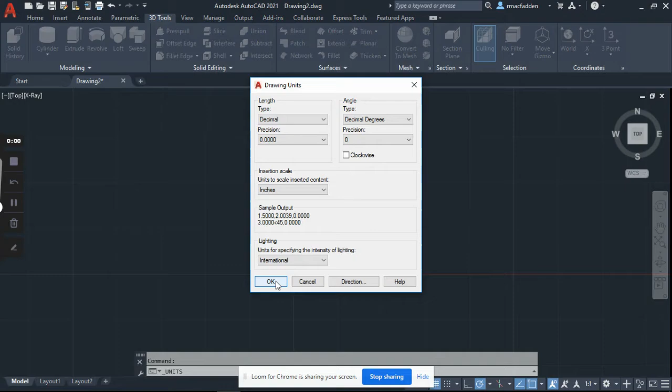Next, go to the toolboard. I have 3D tools open, but if you don't, go to Show Tabs and select 3D tools so you can view the toolbar I'm using. Once that's done, we'll start with our first shape.

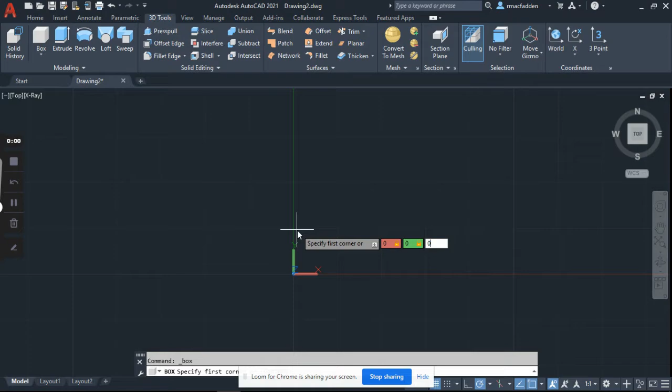We start with a box at coordinate point 0, comma 0, comma 0 - the X, Y, and Z coordinates for the start of our box. Once I hit enter, the second corner is 2 in the X, comma 1 in the Y, comma 0.125, which is the decimal equivalent of 1/8 of an inch. Once that's selected, I hit enter.

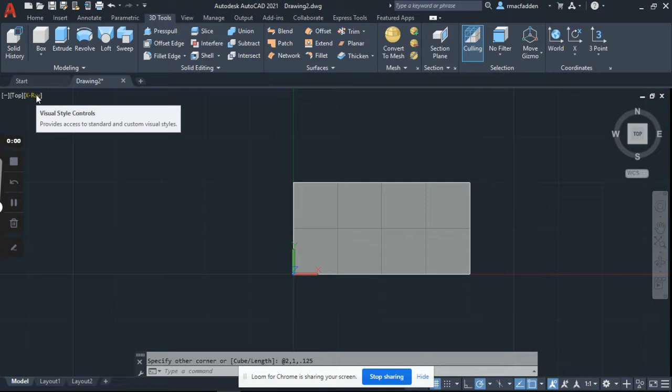If your object looks different, this is shaded gray. In the top left of my screen, I have X-ray selected. You'll be set to 2D wireframe when you first open the program, but I suggest working in X-ray as it makes things easier to see.

When I go to the view cube in the top right and select one corner, it takes us to 3D view, so you can see the object and the lines selected. In 2D wireframe it would still be there, but it wouldn't show that there's an object, just the lines. Alternatively, we could use realistic, which is solid, and we don't see the lines until highlighted.

My personal favorite is X-ray, so we'll move on to the second step: a second box. We're going to offset this one with coordinates 0.125 for X, comma 0.125 for Y, and set the height to 0.0625, which is 1/16 of an inch. Once those three coordinates are set, I hit enter, and it shows the box.

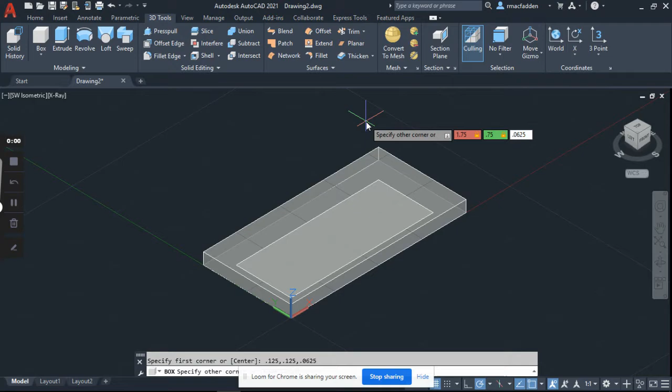We want a nice 1/8 inch border around the whole piece, so our secondary coordinates are 1.75 - a 1/4 inch less than our original - comma 0.75, a 1/4 inch less on the Y value, and 0.0625 of an inch, or 1/16 inch tall. Once we have those three coordinates, we hit enter again, and now we have a box within a box.

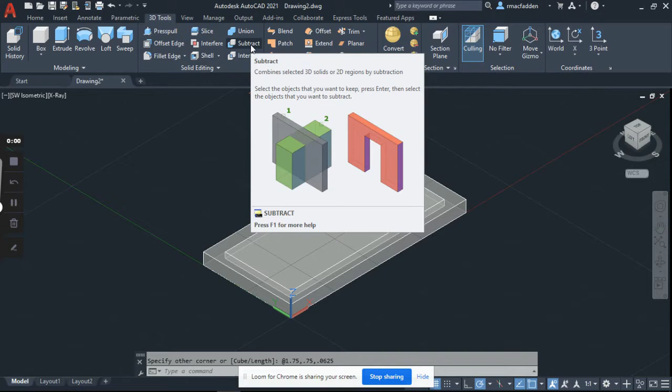We're going to make our first shape here using the subtract command. AutoCAD lets us hover over to see what we're expecting to do. We're subtracting our second shape from the first: first select the object you want to keep, press enter, then select the object you want to subtract. The object we want to keep is our main rectangle, the first one. Select enter, then make a new selection - making sure we only select the inner rectangle - and press enter again. Now you can see we have a recessed area.

For the next step, we're going to go back to our top view and hit the Home tab. On the Home toolbar, we have our text option.

So we're going to select single line text. We are going to start it somewhere off to the right, and we are going to make it a height of 0.375 or 3/8 of an inch. Depending on the size of your name, you may need to make this smaller, or you may be able to make it larger. My name is quite short. It's just Ryan, so 0.375 is going to fill my space nicely.

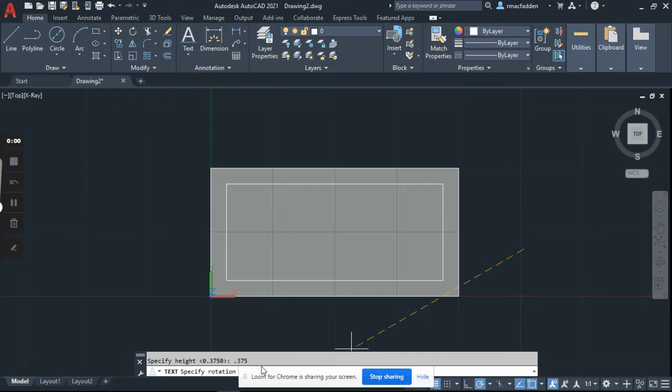Once I have the height, I select enter, and then it's going to, on the bottom, tell us to specify the rotation. We want to make that 0 degrees, polar or flat in line. Enter again, and it's going to give us our cursor or type prompt. So from here, I'm just going to put the caps lock on and do my name in all capital letters.

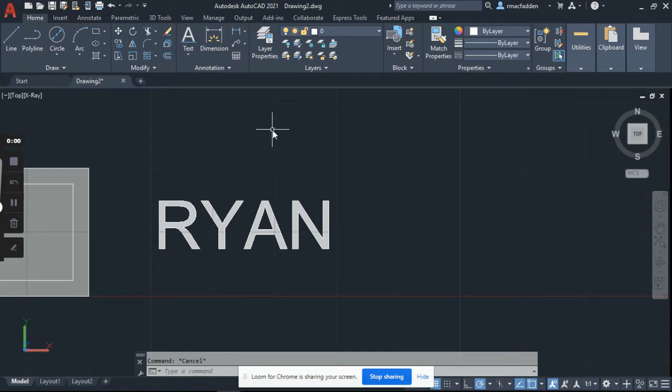I then click off the screen, and it's going to give me the opportunity to do more text if I so choose. I don't want to, so I'm going to hit the escape key a couple of times to get out of it. Now we can't manipulate this text as is, so what you need to do next is on our keyboard, type T, X, T, and we get this TXTEXP. Okay, so this is text explode.

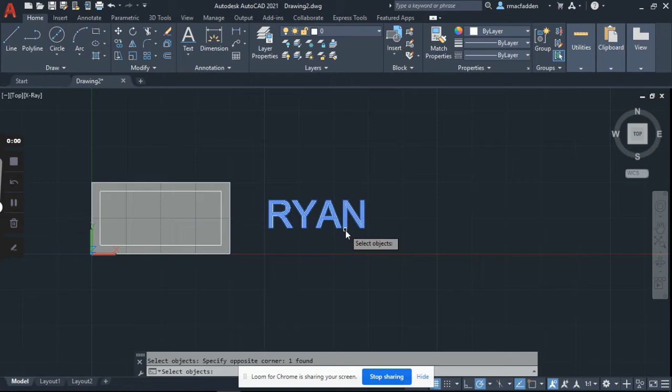By clicking anywhere to the right hand side and dragging left, we're able to select everything in that box. Alternatively, if we go to the right, only whole items within that box will be selected. So we're going to select all of our lettering and hit enter. It's going to work its magic, and now we have an exploded version of our text.

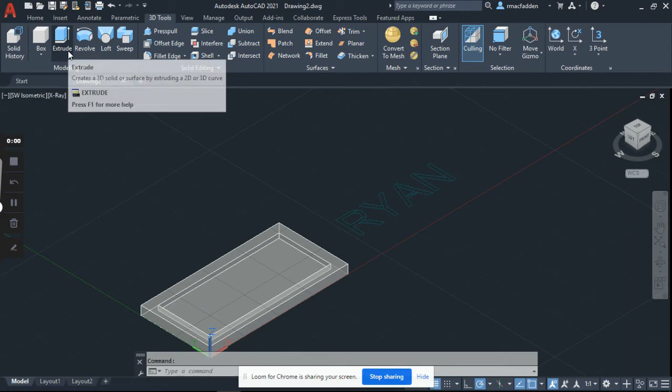The next thing we need to do, I'm going to go back into a 3D view on my view cube. We're going to make this embossed text within our key tag here. So I'm going to go back to my 3D Tools tab, and I'm going to use the extrude command. Again, the easiest way to select this is to click and drag over. Now all of the individual lines are selected.

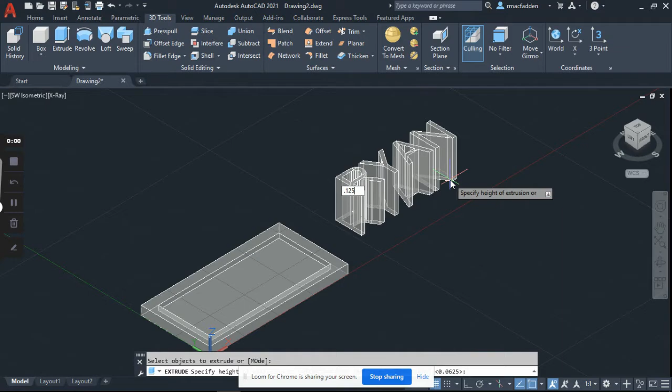I'm going to hit enter, and you can see I could snap to, but I'm going to use a measurement system to make sure that it all comes out the right size. So again, 0.125 or an eighth of an inch is all we're going to emboss it, and we're ready to move it on to the rest of our project.

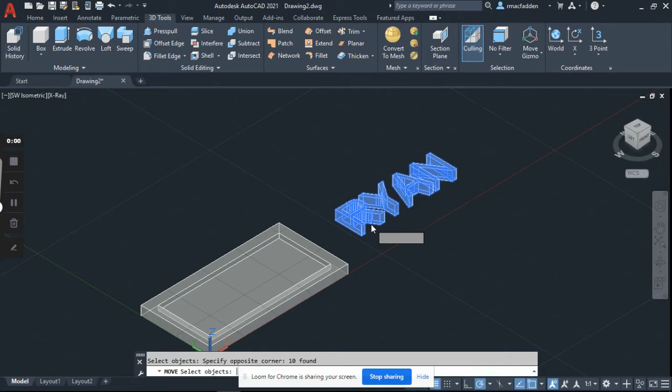Now I'm going to use the keyboard shortcut for move. By just typing the letter M, I get move as the first on my list. I'm going to select that, select all, double check, make sure that I have selected everything I want to. Again, the enter key moves me to the next phase of the command. I'm going to grab this by the lower corner indicated by this endpoint green indicator.

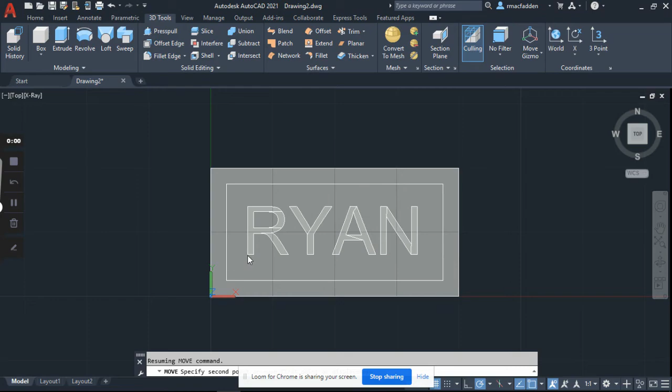Select there, and I'm going to go back into my top view so that I can appropriately center this onto my key tag. I'm going to leave it just slightly towards the top because of how the next part is going to go, which is going to be a hole for our keychain to actually loop through.

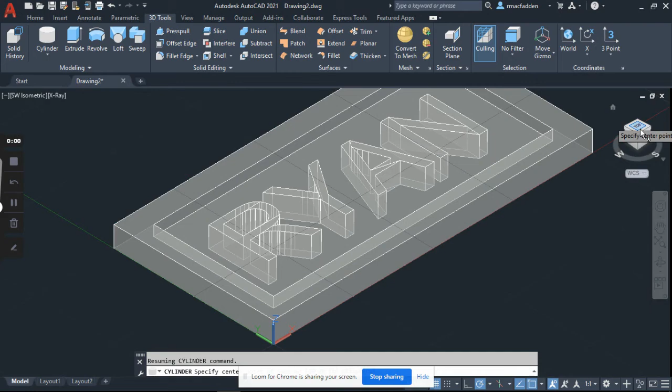With the hole, I'm going to go to my shapes in the top left, and I'm going to choose a cylinder. In my 3D view, I should be able to just grab an extension line. I'm actually going to go to this view so I can carry it straight. You know what? I'm going to go top view just to throw you guys all off. And I'm going to come straight down to about this corner. Roughly approximated is fine. And I'm going to make this diameter.

Let me move my little screen share Loom thing out of here.

A diameter on the bottom toolbar here of 0.25 of an inch. So 1/4 of an inch diameter all the way across. If you end up with a radius of 0.25, you're going to end up with a very large hole. So my 0.25 is going to look just like so, and I still have one more step in my cylinder.

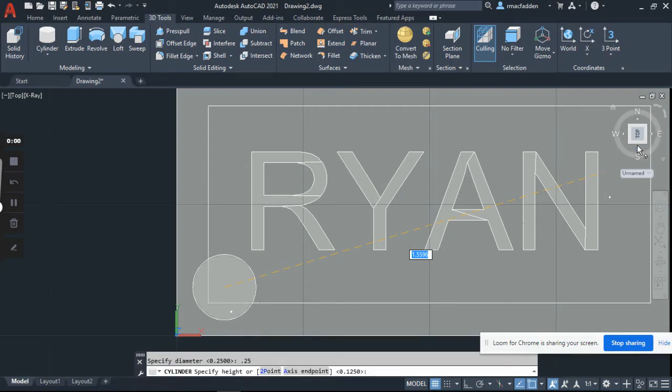I can't see it in this 2D view, but if I go here, I want to just pull it down. Anywhere down below is fine because we're going to go back to our subtract command, and we are going to select our main body, enter, subtract this cylinder, and voila, we have a hole.

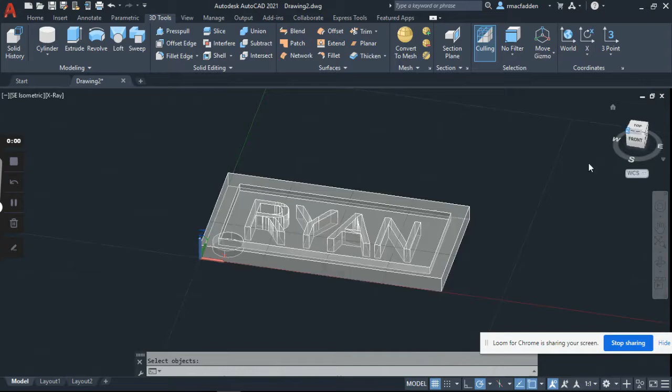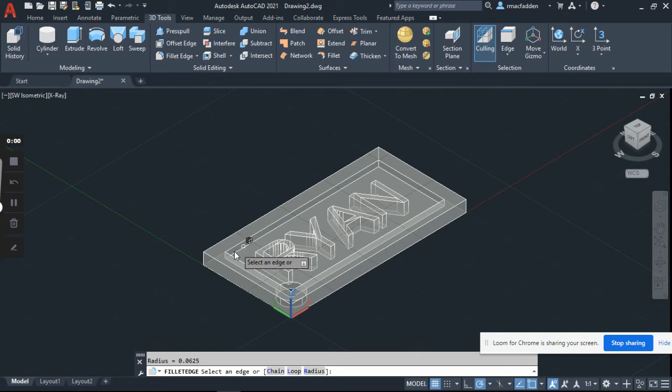So coming back to our main view here, we can have a look at our finished product. If you're happy with the square corners, that's fine. But I'm going to add some radiuses to the different corners, or fillets, to make things just look a little bit better. So I have this fillet edge command on my 3D tools. I'm going to select that, select fillet, and on all these outside corners, I'm going to select them.

So it's a little difficult to see because of our axes. And I may need to switch my view so that I can get to the last one over here. Once I've selected all of the outside corners, I'm going to select radius in my bottom toolbar, and I'm going to make that radius 0.25 of an inch. So a little bit bigger than what we see here.

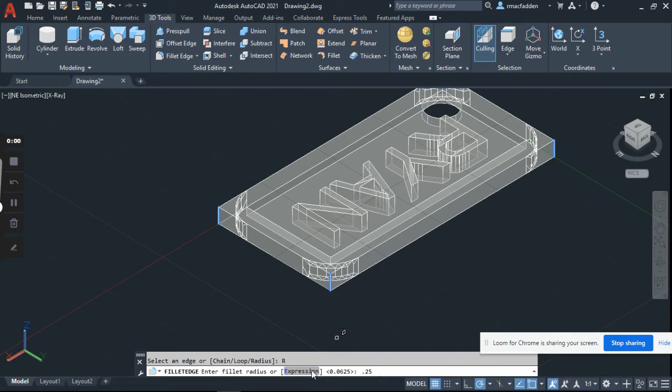Looking pretty good. I'm going to hit enter one more time. It's going to show me what the fillet edge is going to look like and prompt me to accept it. One more enter, and we have our final filleted edge. Now, I don't really like the way that it looks with the square corners inside of a rounded edge, so I'm also going to round off my inside corners.

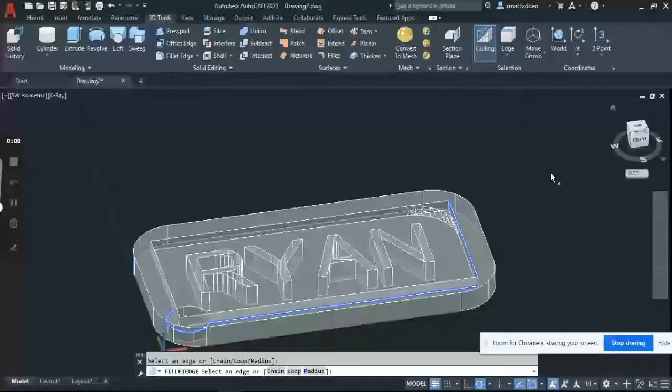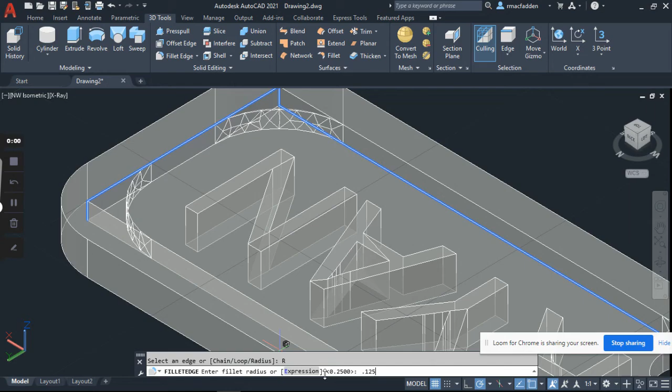I'm going to take the fillet edge command again. I'm going to select these inner lines. I may need to rotate my view cube to see them all. 1, 2, 3, and 4. But I don't want this radius to be 1/4 of an inch because I don't like the way this looks over here. So I'm going to change that radius size to 0.125 or 1/8 of an inch. And looking at that, I kind of get a nice rounded border around my piece.

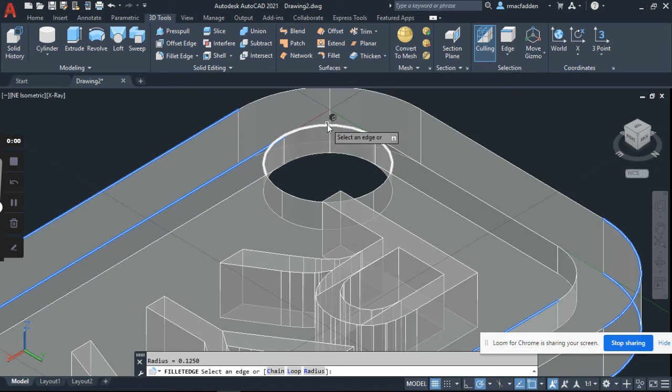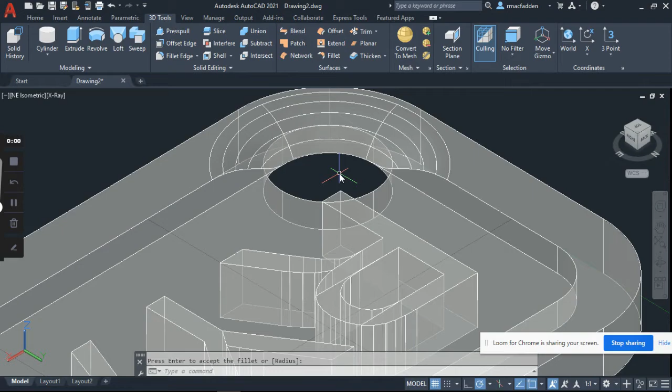Lastly, these square corners are going to be a little bit hard to attach our keys to. So what we're going to do is on our view cube, we're going to take a look at these upper edges. And we're also going to put a fillet edge on them so that we can have a little bit of an easier time attaching this to our keychain. So for this one, I'm going to put 0.0625 or 1/16 of an inch. And there we go. So that's going to fillet that over a little bit for me. And that's going to make it just that much easier for me to slide my keys onto here.

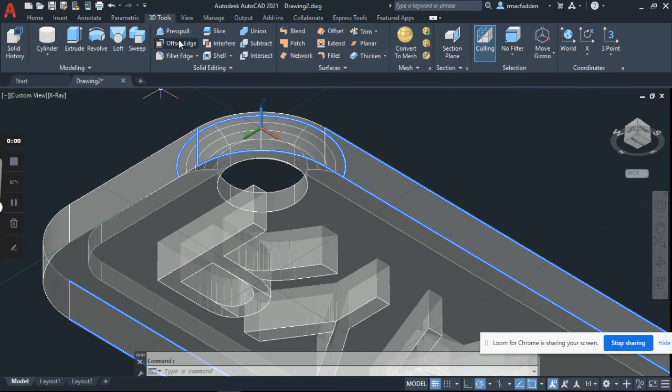So when we look at our finished product from the side, we can see this filleted edge for our keys. If we want to go crazy, we can put more fillets around it, make it a little bit nicer. Perhaps the bottom of this hole here. It's really up to you. You guys can take this as far as you'd like to. But for now, see what happens if I do this. 0.0625 again. That looks pretty good.

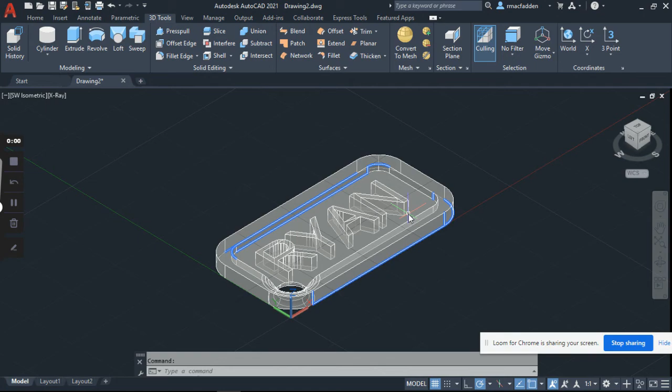I'm going to round both of those off, and if we want to, we could round the edges off, but for the sake of this lesson, I think we're just going to go for a simple design like so, and we're going to get ready to export it to our 3D printer. So to export this, we first need to make it one solid object. So right now we have our individual solids from our lettering and then our unit. So we're going to select this whole situation with the union command, and we're going to make it all one cohesive solid. So now when I pan over, the whole thing illuminates because it is one piece.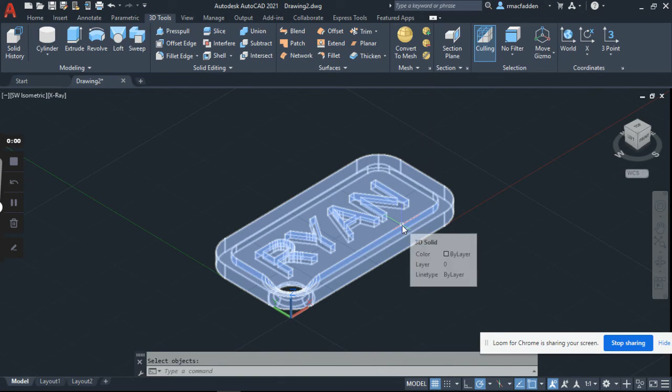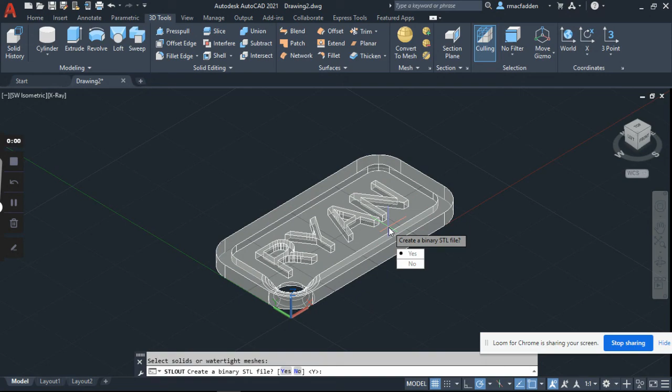Our last step is to save it as a 3D printable file, which for our printer is an STL. So we're going to type STLO into our keyboard shortcut, and we get STL out as a command. Once we've selected that command, we select the object that we want to send out, press enter. It'll prompt us if we want to create a binary STL file, which we do. Enter again, and now we can save it to our computer.

So I already have dog tag saved because I've done one other version of this video with a different screencast software, but I'm going to type dog tag and my initials so that it's easy for me to find. If we have a class USB, I just simply look for my initials and the project name. Once that's saved, we're ready to go.